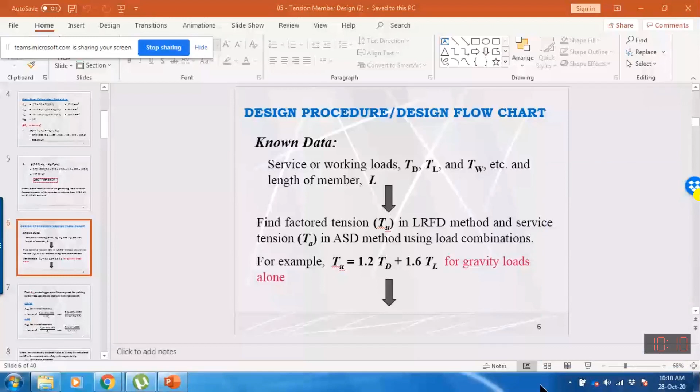Bismillah hir Rahman hir Raheem. So dear student, today inshallah we will discuss the design procedure for the tension member design. So last time we have learned how to analyze an already designed tension member, or how to determine the capacity. It means that we may determine the capacity by considering yielding failure or rupture failure.

If the connection detail is given, we can also determine the capacity against block shear failure. This design procedure or design flow I have already explained in the introductory lecture, but here I will give you the overview again. When we want to design any particular member, especially here tension member, we need to check what information or data is given.

First of all, we might be given the dead load and live load, so here I have used the symbol T. T describes the dead load in tension and live load in tension. If we are designing the compression member, we may use any other symbol, might be P, or moment for the bending case. So it just differentiates the tension member from other members, so that we may know we are actually designing a tension member.

Similarly, we may consider the wind load. Just like in the design classes I have explained how to consider wind load, maybe today in the design class I will further explain how to determine wind load, live load, and dead load acting on any particular tension member.

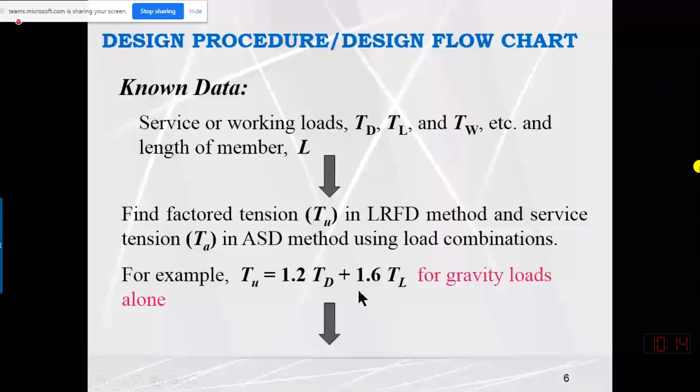After knowing the factored load, if we are proceeding with LRFD design, we equate the factored load with the capacity of the member. The capacity of the member should be more than or equal to the factored load. So here we have derived this equation.

So we determine the area. This is the factored load, and this is 0.9 Fy. If we divide the factored load by 0.9, considering the yielding criteria, we can say that Tu is equal to 0.9 Fy times gross area.

So gross area is unknown. If we divide the factored load by 0.9 Fy, 0.9 is the strength reduction factor for yielding criteria in tension member design, and Fy is the yield strength of the material. We multiply the tensile load by 1000 just to convert into Newtons.

So we can determine one area from yielding criteria, and we also need to determine one area from fracture criteria. Here you can see that Tu equals phi t Tn in rupture, and phi t Tn equals 0.75 Fu times effective area.

If we multiply the effective area with U, we can convert it into net area. Then if we further multiply net area with R, we can convert it into gross area, because we actually want to determine the area of the cross section without the punched hole. So R is the factor to convert net area into gross area, and U is the factor to convert effective area into net area.

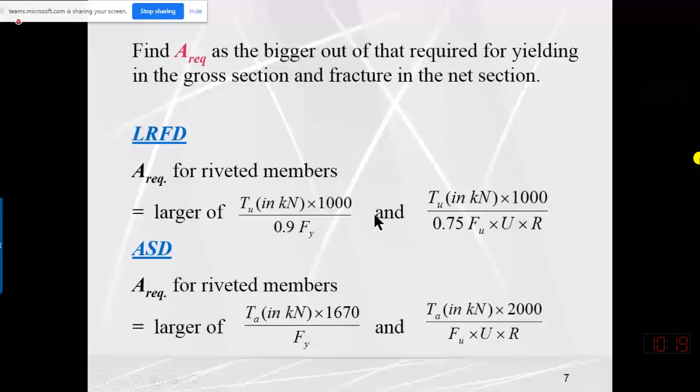Okay, here I have written these two equations again. So we can determine where our value can be. Let me bring it up.

R, where any reasonable value, we can assume any reasonable U and R value. I told you that the U value, R value should not be less than 0.8. So the minimum value of R will be 0.8 as specified by the code, and the U value we assume normally 0.8 to 0.85 depending upon the case. When we are solving the example, I will give you the idea of what U value we need to consider.

For the welded case, if we want to weld a member with another member or with the gusset plate, in that case we are not punching a hole. If we are not punching the hole, it means we are not having net area. If we are not having net area, there will be no rupture failure. So in that case, we only need to use the yielding criteria. We don't need to follow the rupture criteria, because we are not punching the hole. If no net area is available, there will be no rupture failure.

So in welded connection, we have to determine the area required only from one equation, which is the yielding failure criteria. Then there are some other conditions along with the strength that we need to satisfy, b minimum.

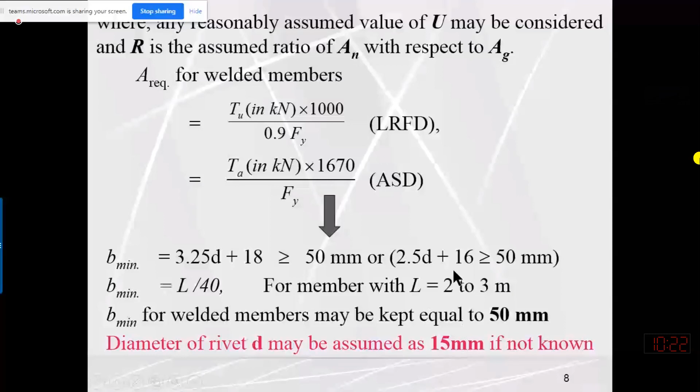Again, we are having a stability criteria as well. The stability criteria is that slenderness ratio should be less than or equal to 300. That I have missed here, so I will write it here.

So what we do is select the trial section. We need to select a section based upon these criteria. Actually, in the field, we need to select the section among the available sections—maybe in the market there might be only 10 sections available, so we have to select from those 10. But for our practice, we have a number of steel sections available in the LRFD manual. So we will consult the LRFD manual steel section property table, whether we want to select a channel section, I section, or angle section. To select, we need to satisfy these conditions: the area of the selected section should be equal to or more than required.

If area required is 500, a section is available whose area is 520. But instead of selecting a section whose area is 520, if you have selected a section whose area is 600, then your design is not okay. Your design is wrong, so you may not get full marks because you have selected an uneconomical case.

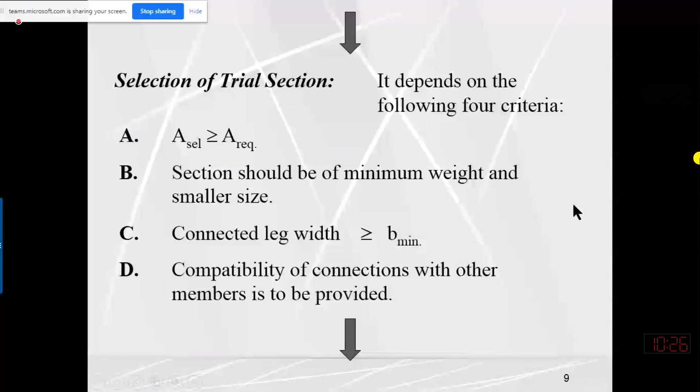Okay, after selecting the section, we move to capacity analysis. Capacity analysis means the section type is known, area is known, geometric properties are known, and these we can easily determine from the LRFD section properties table. Then next we need to determine the capacity, so capacity analysis is an integral part of design.

After that, we need to check the capacity of the section, whether the capacity is more than the factored load or not. Now, in that case, we can determine the capacity by considering the yielding criteria. So capacity in yielding will be phi t Tn equal to 0.9 Fy into area of the selected section. Fy is the yield failure limit of material strength. Area we already know from the section properties table. This phi is the strength reduction factor in yielding criteria.

So if we divide by 1000, this is phi t Tn, and this should be more than Tu. Similarly, we need to determine the capacity in rupture or fracture. In fracture, phi value is 0.75, and it means we have to use the ultimate strength limit. Here we know the area of the selected section.

So if we know the net area, the net area can be multiplied with the U value. Because we know the actual section detail, we can multiply the net area with the U value, since here we have to use the effective area. If connection detail is given, we can determine the net area, and so we need to determine the capacity in rupture.

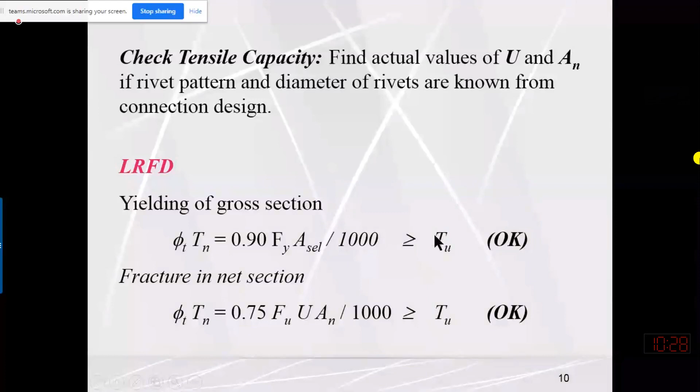So both capacity in yielding and rupture should be more than the factored load. If this is not satisfied, then we select a section with higher area. So this is the capacity check in LRFD.

Okay, after that we need to check the slenderness ratio. Slenderness ratio is determined by the length of the section divided by R minimum, where R is the radius of gyration. R minimum means we have to use the radius of gyration that is lesser out of Rx and Ry.

Rx and Ry values for any particular section, single angle or single section, we can pick from the LRFD manual. So it means that if we are having a channel section, T section, or I section, a member will always buckle about the axis for which the radius of gyration is minimum.

So we have to check whether Rx is minimum or Ry is minimum. But in case of single angle, the single angle neither buckles about the x-axis nor the y-axis. Rather, it buckles about another axis, which is inclined to Rx and Ry. We refer to this as Rz. So for a single angle section, Rz will be the R minimum, which is the radius of gyration corresponding to the axis about which any particular section will buckle.

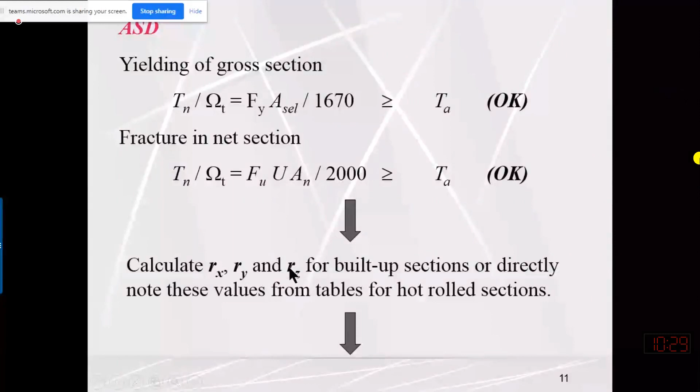And if the slenderness ratio is less than 300, the section is stable. So the minimum B criteria also needs to be checked. For the fatigue check, we do not directly apply it, but we assume that the fatigue life is more than 20,000 cycles within 25 years of service life. So we simply write this line.

So at the end, what we do is design the lacing. Lacing is for the built-up section, if the section is built up.

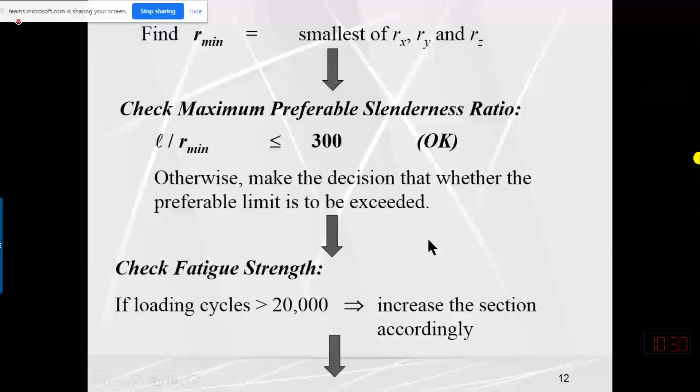Here, as a typical example, we have two channel sections with flanges inverted inside. First, from the edges on both ends, we connect the channel section with an end tie plate, provided on both sides. We punch one hole in this plane and connect the plate with the help of a fastener. Similarly, on the other end, we punch a hole on the flange on the other side, and provide a plate there as well.

So these are the bolts along the length, and these are the bolts along the cross section, perpendicular. At any cross section, four fasteners are present - in each channel, we have two fasteners, one in each flange. If I cut the section here, as shown, at any section there are four fasteners: one here, one underneath, one here, and one in the flange on the back side.

Now, how to design this end tie plate. The width of this plate will be equal to the total width of the channel section after joining them.

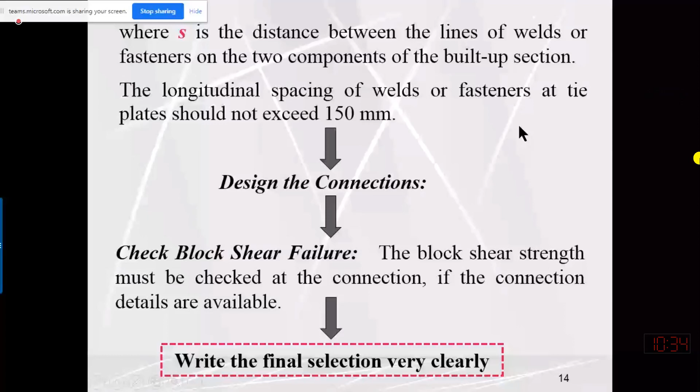Okay, here, this is the example. So in this example, actually we want to determine the capacity of a built-up channel section.

So in this built-up section, what is the difference? Actually, we do not know the geometric properties, meaning moment of inertia or radius of gyration of the built-up section. Just from this example, we learn this concept.

So first of all, we need to understand this statement. Calculate factored load capacity of a double channel section member of A36 steel. A36 steel means Fy is 250 megapascal and ultimate strength Fu will be 400 megapascal according to AISC LRFD specification. Length of the member is 5 meters and the member consists of two channels.

Two channels, 200 is the nominal depth and 20.5 is the unit weight. Designation of the channel is C200 and 20.5, with flanges turned out just like this way. In the previous case, the flanges were facing each other.

But in this built-up section, the flanges are turned out with a clear gap of 100 millimeter. Clear gap means the gap from the outer face of this web to the outer face of the web of the other section, which is given as 100 millimeter.

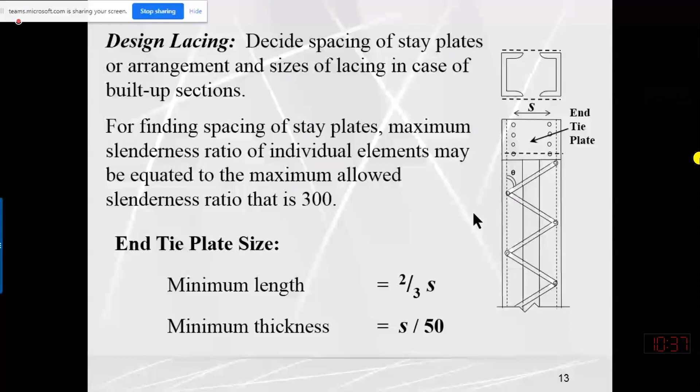Okay, other thing is that he says assume, two value shear lag factor he has given already. You assume shear lag factor 0.8. So area of this section.

First of all, if you are opening the LRFD manual, I believe the page number might be 50. Page number, section is 200. So page number 68. No, actually that is 65. Sorry. The 200, and yes, page number 65.

If you are opening page number 65 of the LRFD design aid, you may see that channel sections are provided in 5 groups. In the last group, we are having 3 sections. So the middle section is C200 × 20.5.

If you check the gross area of this one channel section, it is written 2610. Similarly, you can also see nominal depth is 203. Flange BF is 59, you can write it down. Flange thickness 9.9, we require it. Web thickness we might not require.

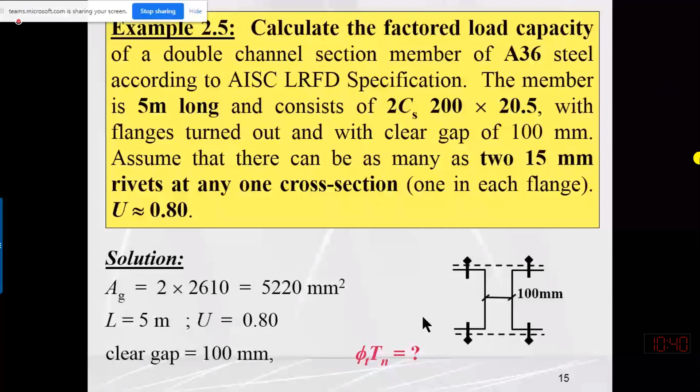So if you have picked the values, okay, next we need to determine the capacity of this section in yielding and in rupture. So first of all, if I want to determine the capacity, phi t Tn, capacity is the lesser of the yielding failure criteria or rupture criteria.

So in yielding, phi t Tn is equal to phi t Fy into gross area. Phi value will be 0.9 in yielding failure criteria. Fy is 250. So gross area we know, area of one channel is 2610. So combined area of two channels will be 2610 multiplied by 2. If we divide by 1000, that will be the capacity in yielding, which is 1174.5.

In rupture criteria, capacity is equal to phi t Fu into Ae, effective area. So effective area is converted in terms of net area by multiplying with the U value. U value is provided to us as 0.8.

So net area we need to determine. Why? Because we are given the connection details. We have provided the information that at any section we have punched 2 holes in each section, so in each one channel.

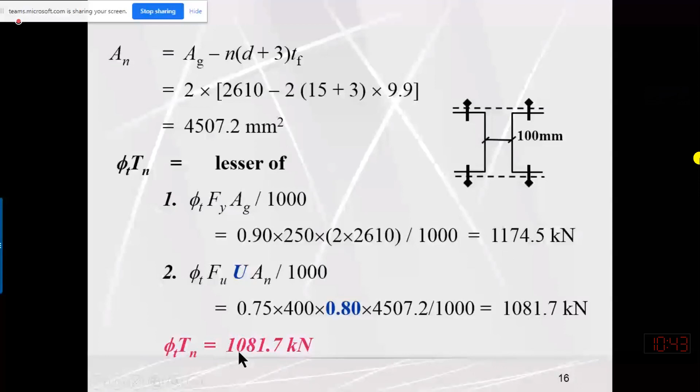We need to check whether the slenderness ratio is less than 300 or not. So in this case, let me tell you, for the built-up section, for any built-up section, Rxb mean that... let me modify a bit for you.

Yes, and in this case, this is supposed to be Ryb. Radius of gyration of built-up section will be exactly equal to the radius of gyration of single channel section in x direction. Why? Because, for example, you can see that this is the centerline of built-up section, centroid of built-up section, and this might be the centroid of single section. So the x-axis of single section and built-up section, they are passing from the same axis.

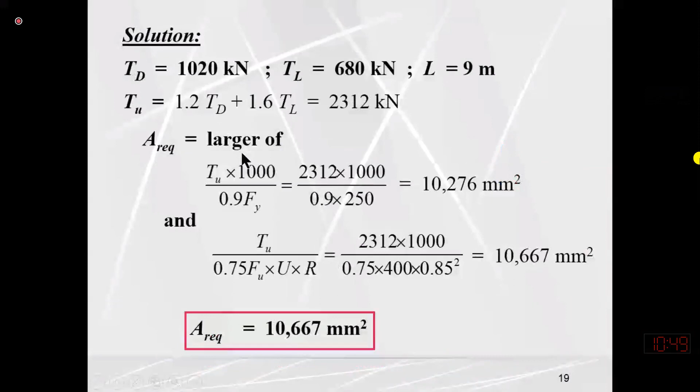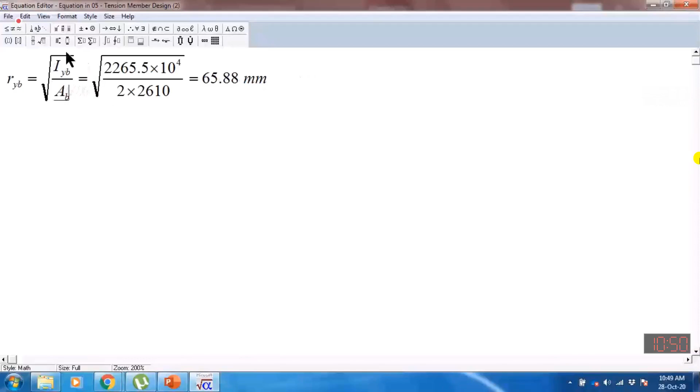So here, radius of gyration can be computed as moment of inertia of the built-up section divided by area of the built-up section. I y b we have computed here. Area of built-up section will be the summation, or if we multiply the area of one section by 2. So when we determine RYB, it is 65.88.

R minimum is the lesser of RYB and RXB. RYB is minimum at 65.88, so R minimum we have to use is 65.88. So length divided by radius of gyration, which is minimum. Length needs to be converted into millimeter, divided by 65.88, so slenderness ratio comes to 75.9. This value is less than 300, so this is also okay.

We also need to check since we are connecting each section through its flange. What is the width of the connected portion? The connected portion is the flange. So from page number 5, this value is equal to BF value. So BF value is 59. Check whether this value is more than b minimum.

b minimum is 2.5D. D, if not given, we can assume as 15 plus 16. So this answer is 53.5. 59 is more than b minimum, which means we have sufficient width available to provide this fastener.

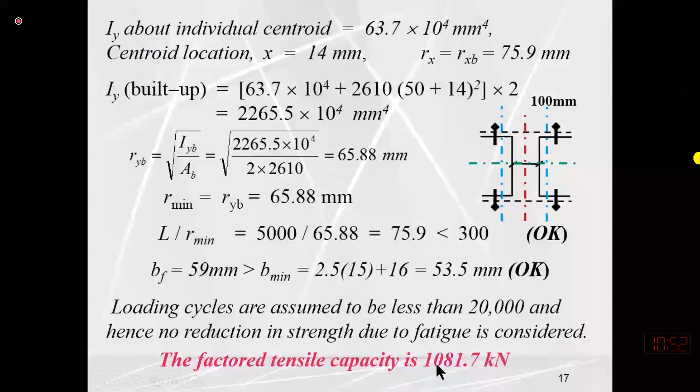At the moment, if you are having any question, you can ask me the question. I will give you some time for the question.

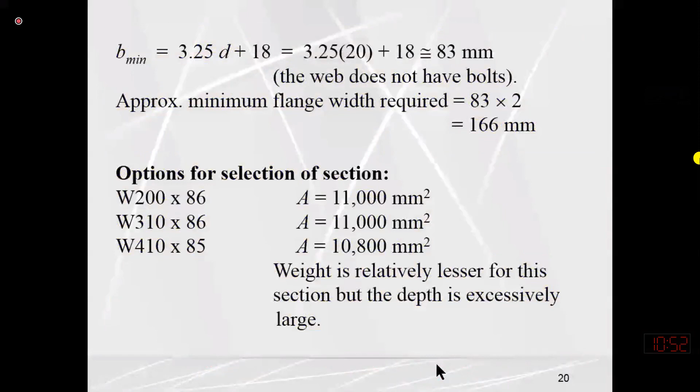Yes, Uzair Shafiq, please ask.